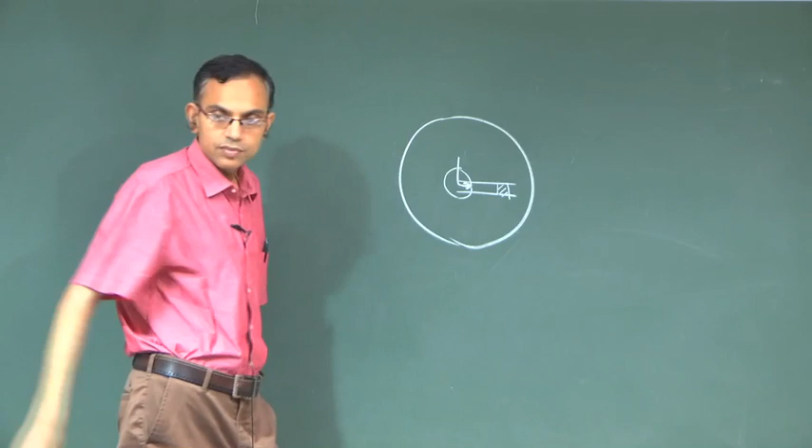Let us say there are certain channels cut into the disc. I will show later how channels are cut in the disc. For now imagine there is some channel in the disc, with some reagent present, and through the central reservoir you insert a drop of blood. Now, since this CD material is hydrophobic, the blood will form a meniscus like this, and it will not actually be driven towards the target site.

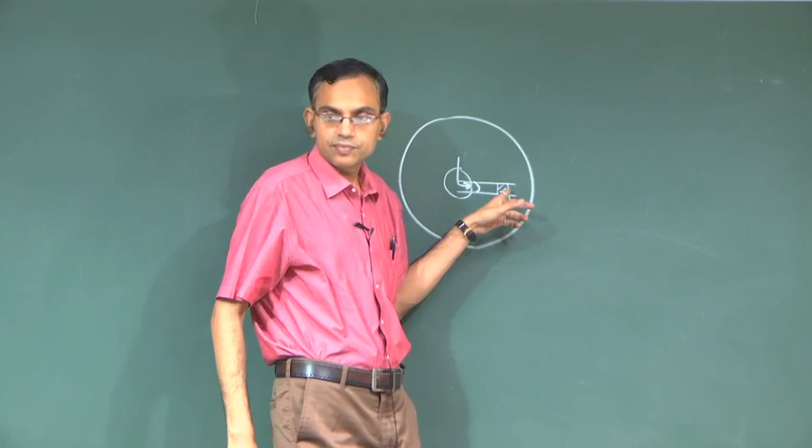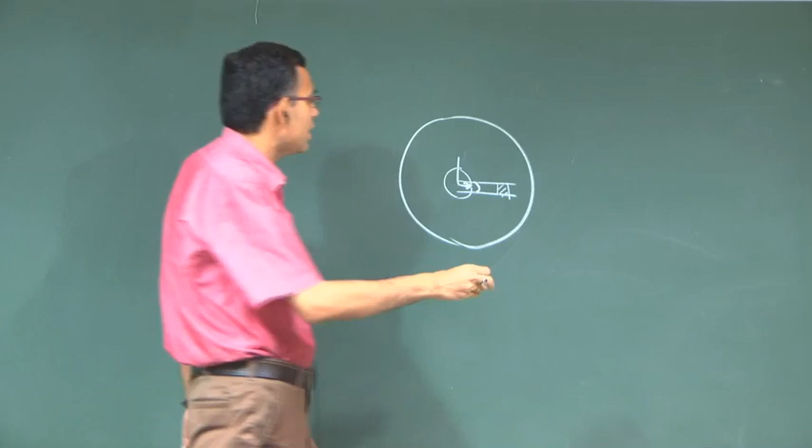Had it been hydrophilic, it would spontaneously move by surface tension driven flow. So something has to drive it. What will drive it? You make it rotate with respect to its axis. If you make it rotate, by centrifugal action the fluid will be moving, but there is a critical rotational speed at which it starts moving, and then it goes to the reaction site, does a reaction, and based on the result some disease can be detected. This is the broad motivation for why we want to study the essential science of the lab on a CD.

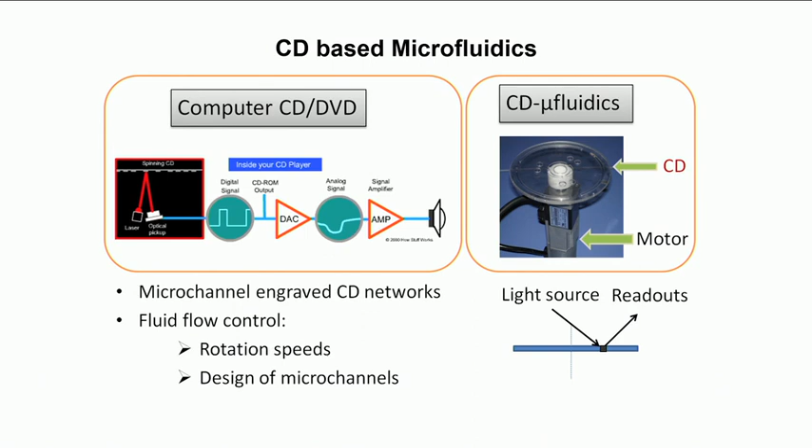So, how is the fluid flow controlled here? The fluid flow is controlled by rotational speeds and by the design of microchannels. So, how can the rotational speed control the fluid flow?

The effective formula is worked out in the slide, but for your convenience I will also work it out on the board.

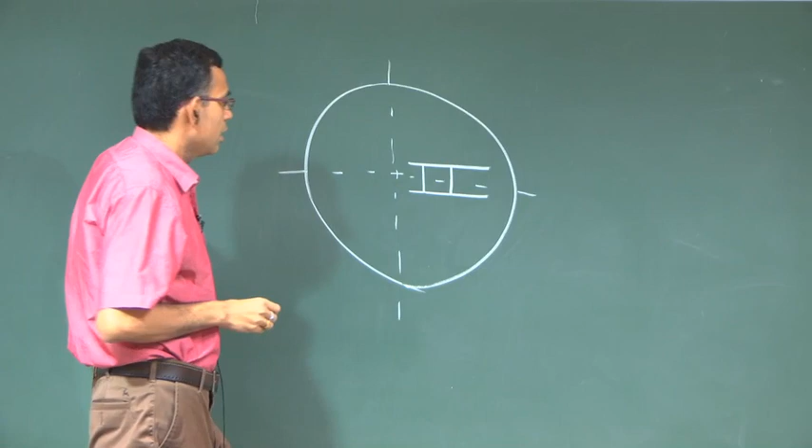Let us say that you have a fluid which is filling a part of the capillary in the CD, and then we consider a small element dr in the radial direction. The radius limit is from r equal to r1 to r equal to r2. Of course, the meniscus is not flat, but just for simplicity I have drawn it like flat.

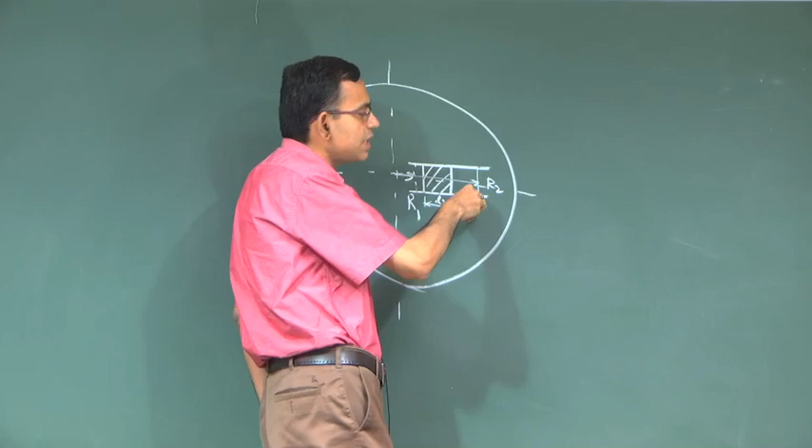It will be curved with curvature bending inside because it is a hydrophobic material. So, let us identify what are the forces acting on this element.

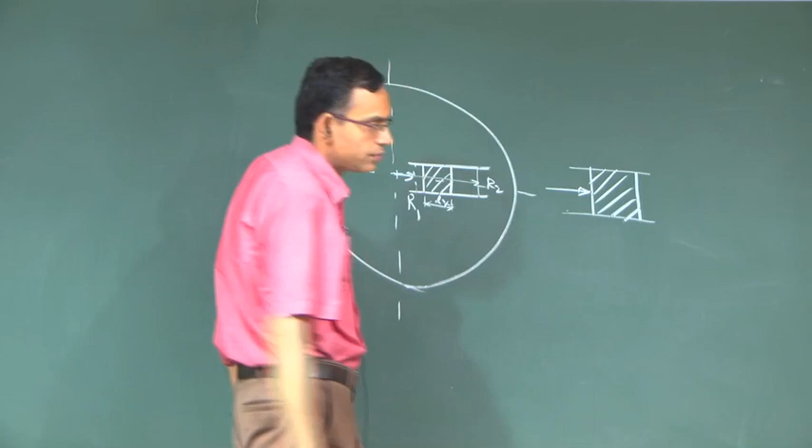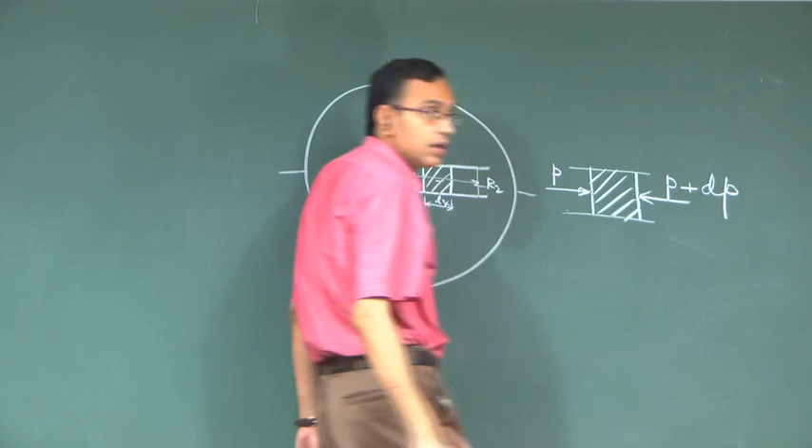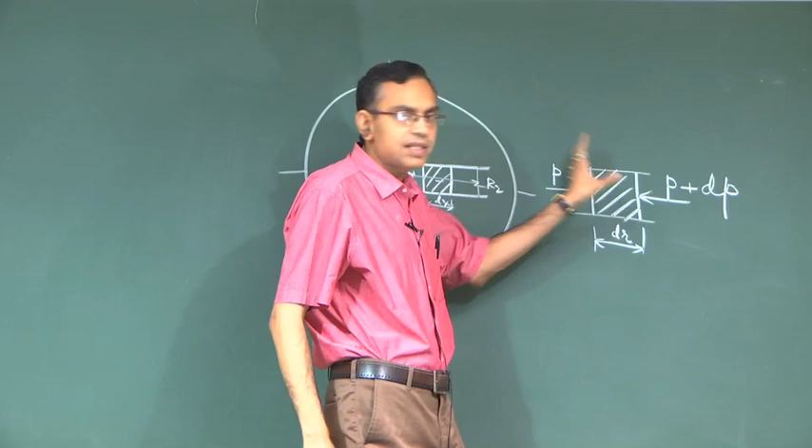So, let us say that you have pressure P here, and here pressure P plus dP. If we are sitting on this fluid element, then this pressure gradient will be balanced by a force which is called centrifugal force. So this is P into area, and this is P plus dP into area.

Or, if we are not sitting on this disc, we will see that there is an acceleration towards the center, which is called centripetal acceleration. So centrifugal force is an equivalent pseudo force that you feel if you sit on the rotating platform, and centripetal acceleration is the acceleration you get if you analyze from an inertial reference frame by sitting outside the rotating material.

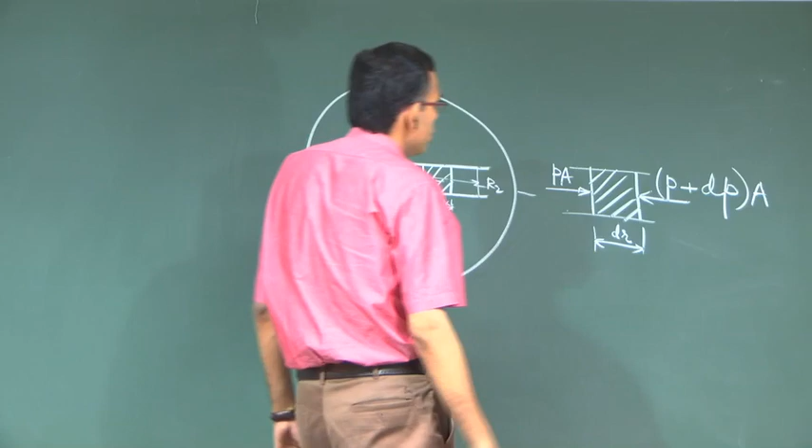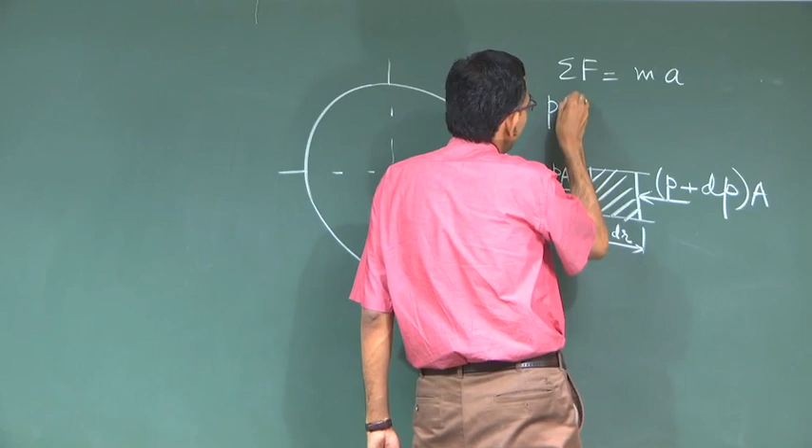So let us think about that inertial frame based analysis. Resultant force is equal to mass into acceleration. So resultant force is P into A minus P plus dP into A. What is the mass of this? It is A into dr into rho, and the acceleration is minus omega square r.

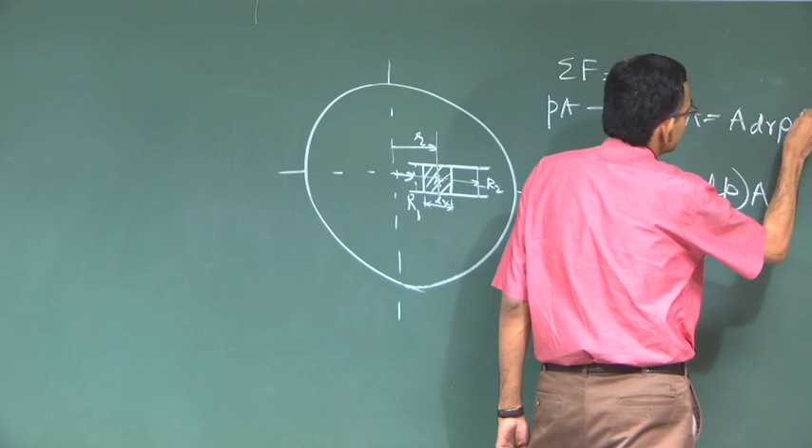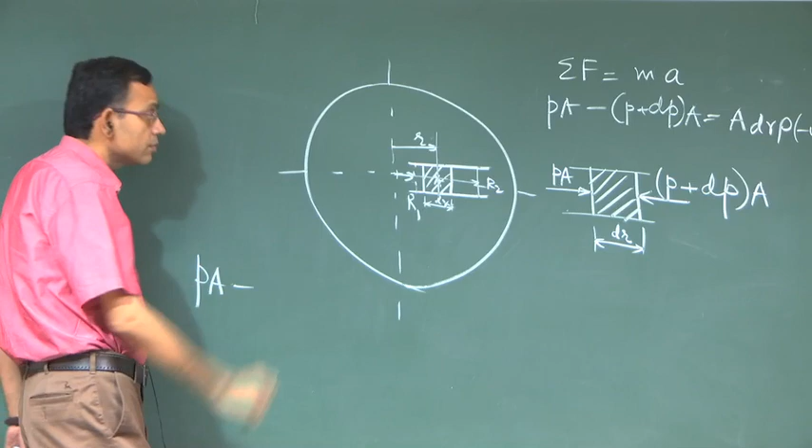Let us say this radial location is r. So, P into A minus P plus dP into A is equal to minus A rho dr omega square r. So you have dP/dr equal to rho omega square r.

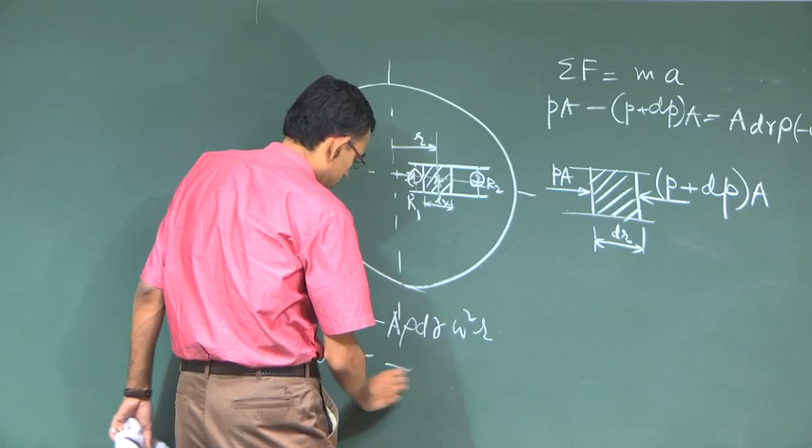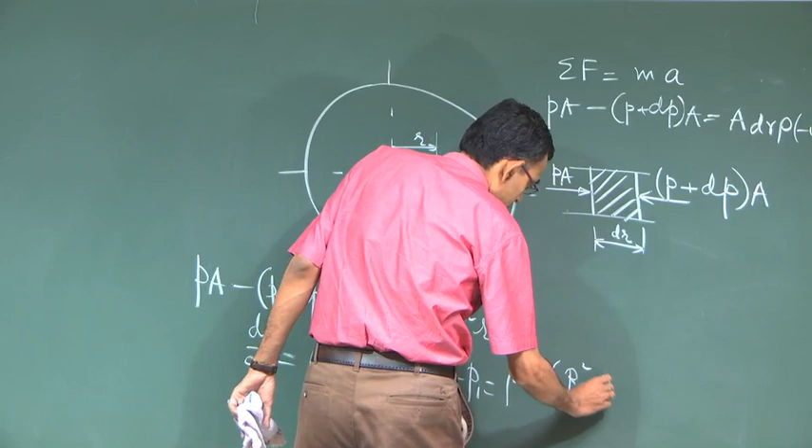Now, if you integrate this from section 1 to section 2, r dr becomes r square by 2. So it becomes rho omega square times r2 square minus r1 square, by 2.

So now, when you have this P2 minus P1, P2 minus P1 into A is the net driving force, where A is the cross sectional area of the channel. And what is the resistive force?

Resistive force is the surface tension force here. It might be confusing to you because in one of the previous chapters we were studying surface tension driven flow. Now you might argue that just a few chapters back you were talking about surface tension driven flow, and now you are telling surface tension is a resistive force. Surface tension has become a resistive force because the contact angle has changed here, since it is a hydrophobic material.

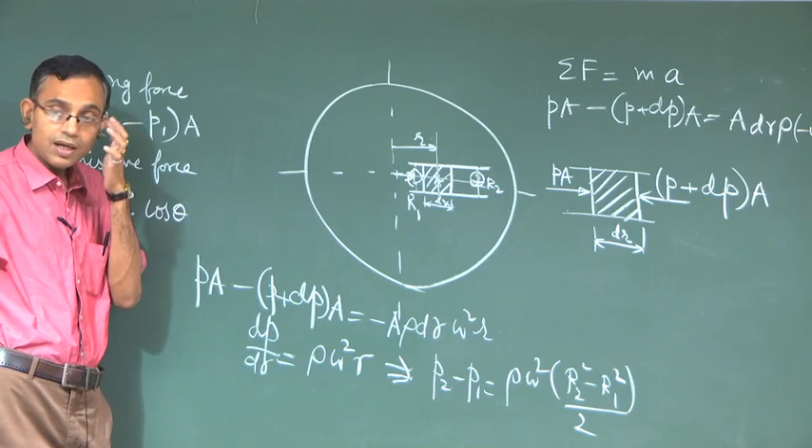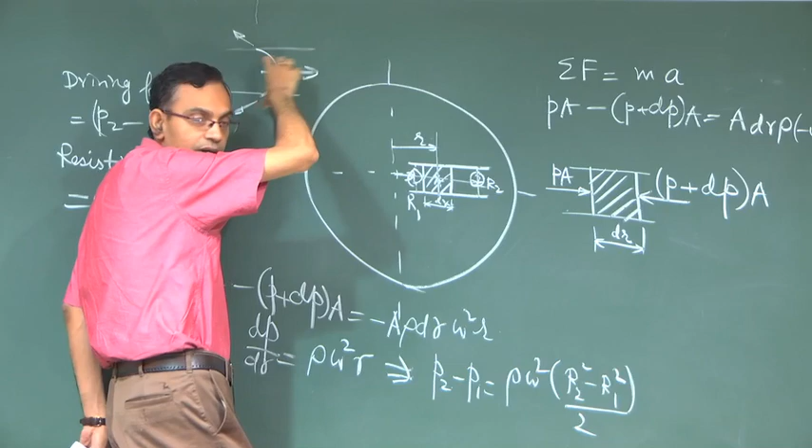Okay, so if you look into the meniscus, it is like this. This is the direction of flow. Surface tension is trying to hold it like this, and centrifugal force is trying to move it radially outward. So this is the physical force balance that you are going to have here.

So when will it start moving? The fluid will start moving when the rotational speed is just enough to make the centrifugal force overcome the surface tension force. So that is P2 minus P1 into A is greater than or equal to sigma into C cos theta, where C is the perimeter of the cross section.

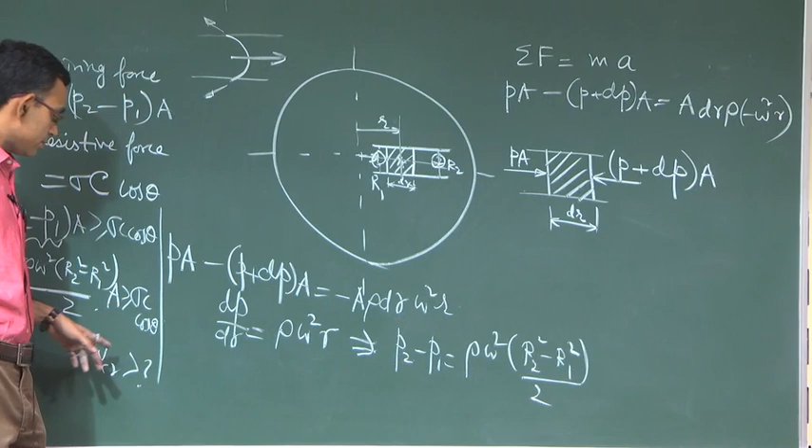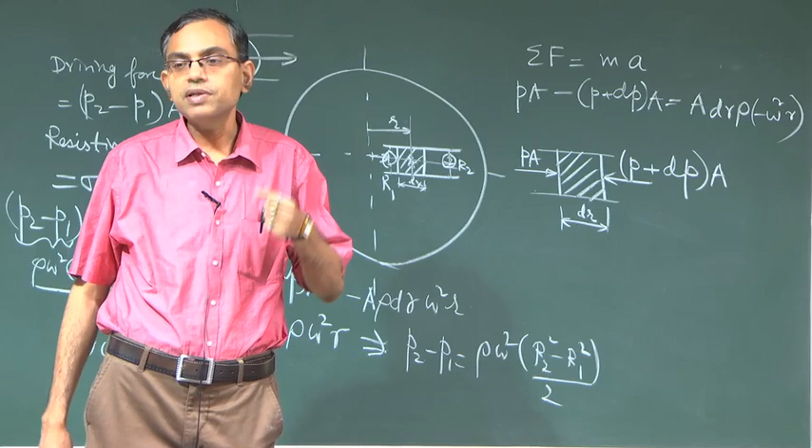So that means this is rho omega square, R2 square minus R1 square, by 2, is greater than or equal to sigma C cos theta. So from here you will get a critical omega. We get a critical rotational speed at which the capillary will start getting filled because of the centrifugal force driven flow.

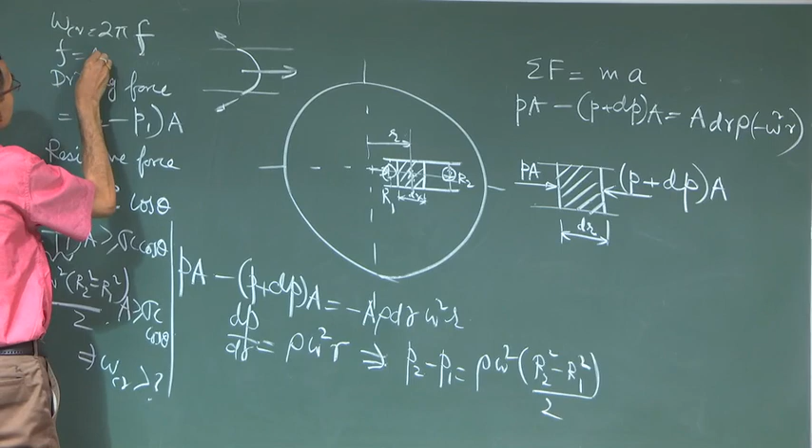So that frequency at which the fluid starts moving across a channel, omega critical, if we call it 2 pi f, then this f is called the burst frequency. This burst frequency is a very important design parameter, because you must know at what rotational speed you must rotate your CD to make the sample move.

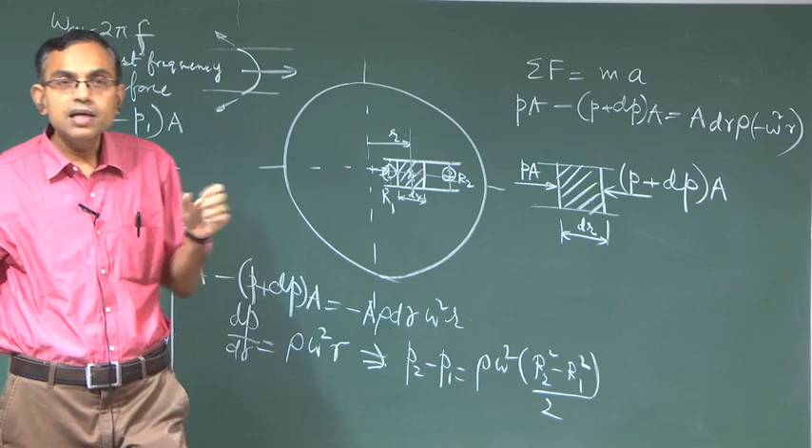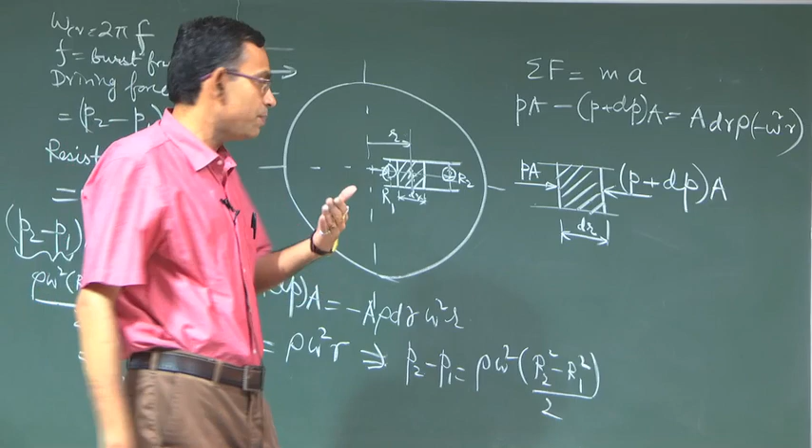One question: by looking into the burst frequency you can see that there is no effect of viscosity in this. Can you tell why? The reason is simple - viscosity plays a role when the fluid is under motion. The burst frequency is calculated when the fluid just starts its motion, so viscosity is not playing its role yet. It is primarily the density of the fluid that matters, but viscosity does not dictate the burst frequency.

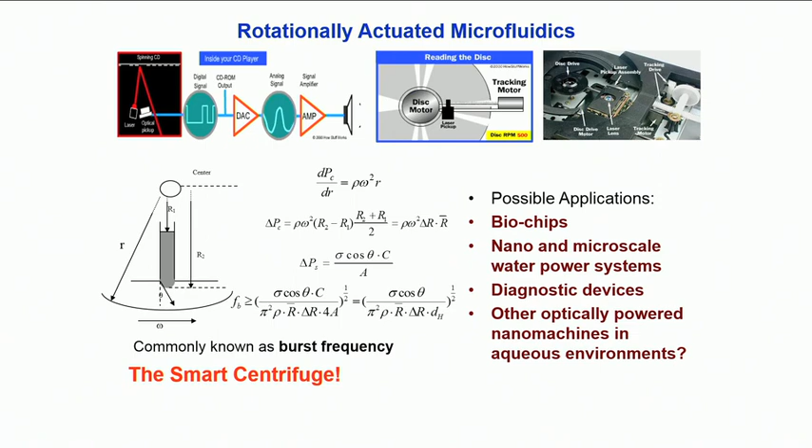So now calculating this effect on a practical CD type device - you will see that this can be designed as a smart centrifuge. You have an idea of a centrifuge which is a large rotating device found in almost all good pathological and biochemical labs. Now, instead of a large centrifuge, you can have a small disc carrying that task. Possible applications could be biochips, nano and micro scale water power systems, diagnostic devices, and other optically powered nano machines in aqueous environment. So it is up to your imagination how you want to use these devices by simply using the rotational effect.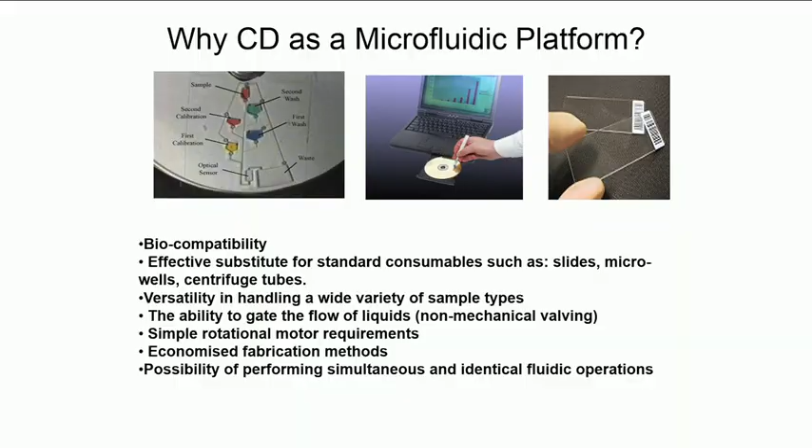So what are the features of this? Flow rates ranging from less than 10 nanoliters per second to greater than 100 microliters per second, as I have already mentioned. The pumping is relatively insensitive to physico-chemical properties such as pH, ionic strength, or chemical composition. Later we will study another method called electrokinetic flows, where the pumping is sensitive to such properties, but that has its own unique advantage, which is why we study it.

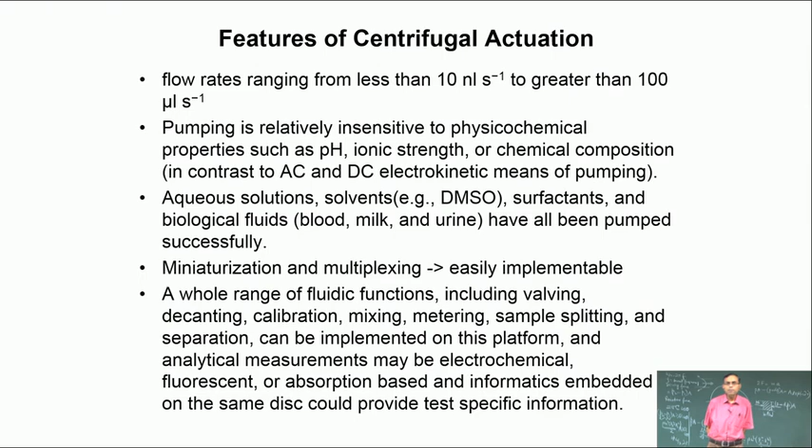Aqueous solutions, solvents like DMSO - a very unique solvent, dimethyl sulfoxide. It is a chemical normally produced as a byproduct of paper production, but later it was found to have many characteristics useful as a drug for certain diseases. So DMSO is a very important fluid. Surfactants, biological fluids like blood, milk, urine - these have all been pumped successfully using this device. Making microchannels on the CD is relatively easy and implementable. Not only that, a whole range of functions including valving, decanting, calibration, mixing, and metering can be integrated on this microfluidic platform.

So, what are the important forces? Let us look into this slide very carefully. We have already discussed the centrifugal force and the surface tension driven force, but when the disc is moving and rotating and the fluid is moving on it, there is an important force which is called the Coriolis force also. So, what is the Coriolis force?

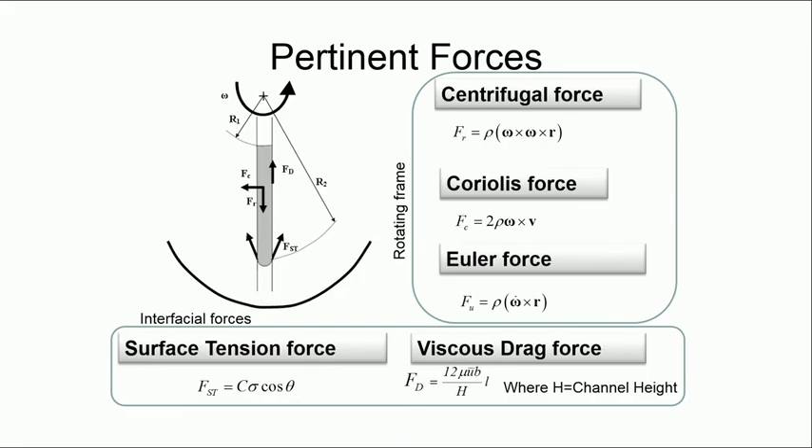So, this lab on a CD is a wonderful thing in science. On one side you can study very rich fluid mechanics, very interesting fluid mechanics by looking into the interplay of all these forces. On another side you can use this interplay of forces to design a device that can solve medical problems, that can do biomedical diagnostics.

So, how is a CD made or how is a CD manufactured? This is essentially again a wonderful thing, because a CD is manufactured in a method where you do not use clean rooms. This has been a revolution in microfluidic technology, because for a long time clean rooms were used for making microchannels. Now, this CD manufacturing does not need a clean room. So, you can use a low cost facility with mechanical micro manufacturing to make the CD.

I will show you how this CD is made in different layers and these layers are bonded together. So, we have a 3 layer approach or a 5 layer approach. This example is a 5 layer approach. So, this layer 1 is a top plate, it has venting holes. Layers 2 and 4 are not really polycarbonate discs, these are essentially pressure sensitive adhesive layers.

So, these are adhesive tapes in which you can simply cut microchannels. In the middle plate it contains all the chambers, this is a polycarbonate disc, and then you have a bottom disc with alignment holes at the same positions. So, now you can bond this entire system stack together to make a single disc.

So, it is just like making a burger. Of course, the meat in the burger is very interesting, the CD making may not be that interesting, but it is essentially as simple as making a burger by stacking various layers.

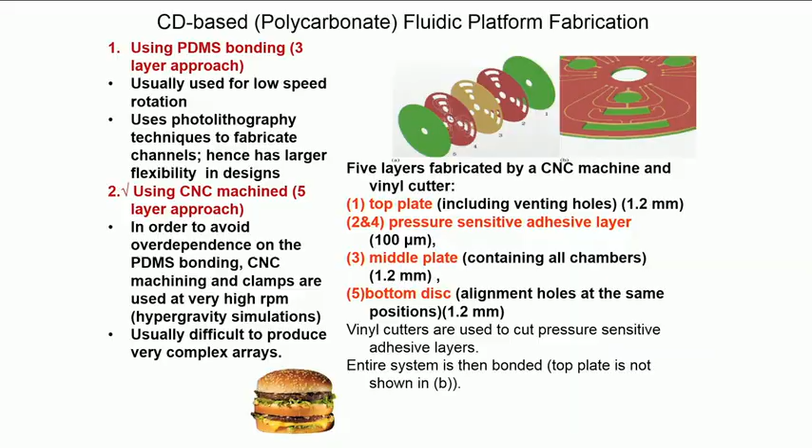So, finally, how do you do experiments on lab on a CD? This is a typical experimental setup. You have a simple servo motor which rotates the disc, you have a camera and you have a strobe light which flashes the light at every complete revolution. That means a point which after one complete revolution comes back to the same point, and there the light will be flashed. So, you can make one point which is actually moving appear stationary, because the point has come back to the same location.

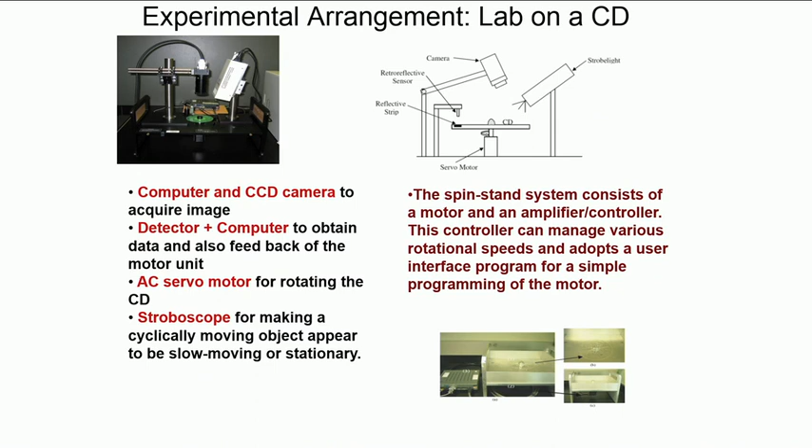So, this is the essential principle of a stroboscope for making a cyclically moving object appear to be slow moving or stationary. So, you have essentially a computer and CCD camera to acquire the image, a detector plus computer to obtain data and also feedback of the motor unit. So, this is a complete setup, and this lab on a CD can be used to do very interesting medical diagnostics in a resource limited platform, and that essentially is a very important component of biomicrofluidic research.